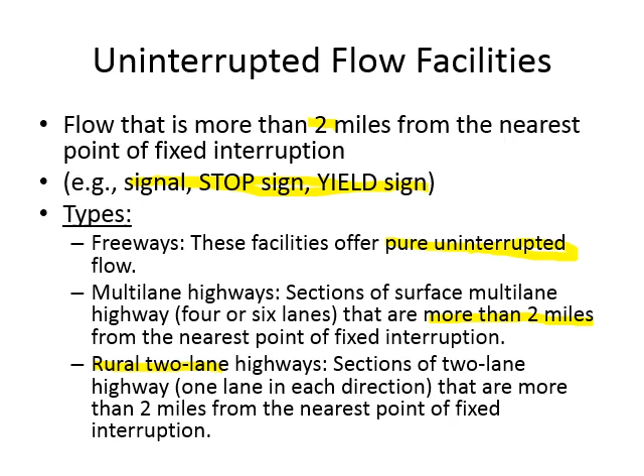The procedure we will follow for finding out the level of service or capacity of these highways is taken from the Highway Capacity Manual, published by the USA. So it is their standard for finding out capacity and level of service. It is published by the Transportation Research Board, which is under the National Academy of Engineering in the USA.

The first manual was published in 1950, and after that they have published several versions of it, with the last one published in 2016.

The concept of a software was introduced in 1994 with the manual. So from 1994 onwards, every manual has its own software which you can get with the manual, and that software is for implementing the procedures described in the manual. So it's a very limited application software.

And the name of the software is Highway Capacity Software. It is published by the University of Florida, and they update it once a new manual is published. But we don't have to depend upon this Highway Capacity Software.

We have other softwares which implement the procedures described in the manual. For example, we have VISSIM - if you search for VISSIM, you can find a student copy for it. We have Sidra - I have a trial version for it, and you can download the trial version as well. We have Synchro, and there are many other softwares that can be used for implementing the procedures of the Highway Capacity Manual. So you don't have to depend upon Highway Capacity Software itself.

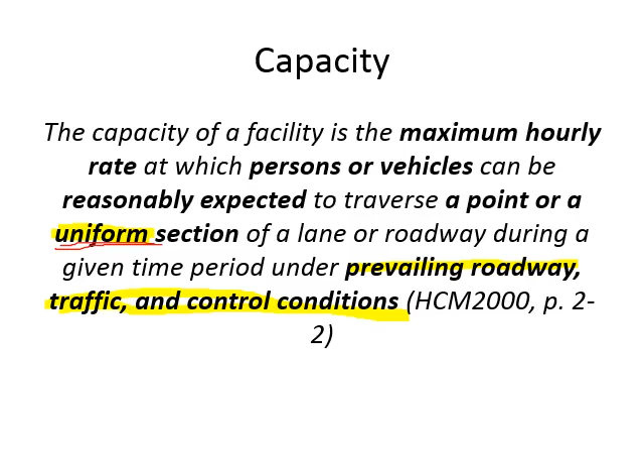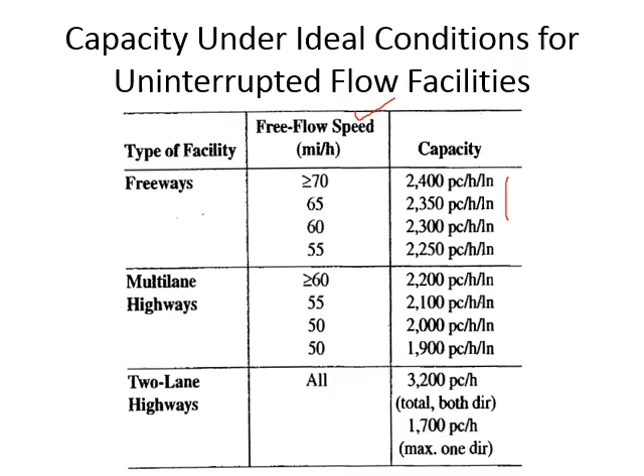Now the highway capacity manual has introduced the concept of LOS. LOS means level of service. LOS stands for level of service. Now why was this concept introduced? Without the concept of level of service, we know two traffic conditions: one is free flow and the other one is capacity of the highway. Now both these conditions are unsuitable for design.

You cannot design for free flow conditions because that means no volume. You cannot design for no volume. You cannot design for capacity as well, because that means you don't have any margin of error. If even 10 vehicles come extra, your highway will get jammed. So designing for capacity or designing for free flow conditions is not valid, is not practical.

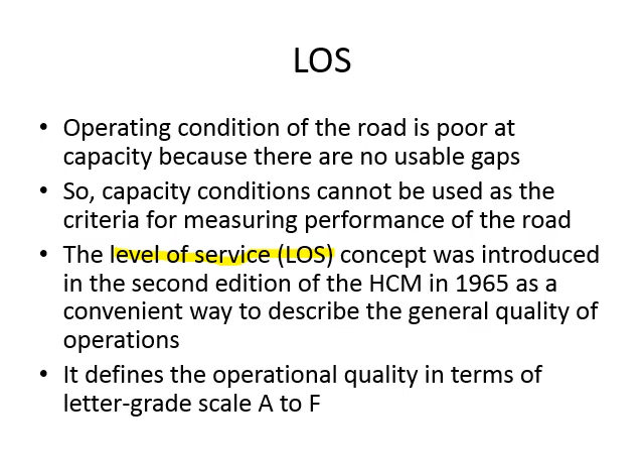So we need some intermediate levels between the free flow condition and the capacity condition for which we can design the highway. These intermediate levels are represented as level of service. This concept was introduced in 1965, and there are 6 levels of service starting from A to F. So just like your grades, A is what you want and F is what you don't want. A is free flow and F means jam, traffic jam. So the performance of the highway is measured in terms of level of service, which ranges from A to F.

So how do we define level of service? It is basically the quality of operational conditions of the highway, or the quality of operations of traffic on the highway. Normally level of service is affected by speed and travel time, and you can measure speed and travel time as well.

But there are other important parameters which are not measured easily and which are incorporated in level of service. For example, freedom to maneuver, how easily you can maneuver within the traffic, how easily you can move, increase the speed, decrease the speed, and so on. What is the condition of traffic interruptions, how many interruptions are there on the road, what is the level of comfort and convenience of the drivers. So all these things affect level of service, and all these parameters combinedly denote the quality of traffic flow.

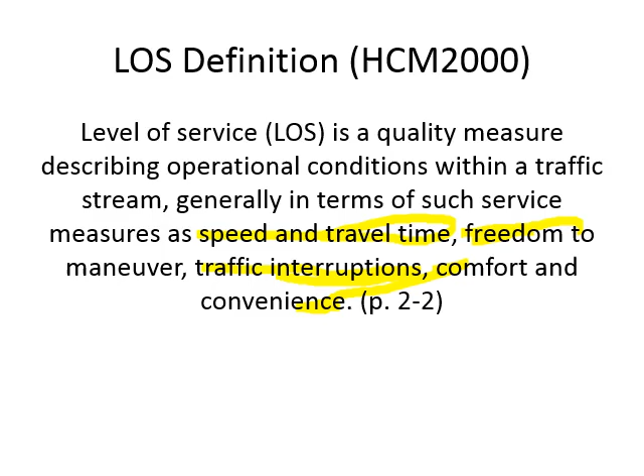So as I said, level of service can range from A to F. A means complete free flow, so your motion or movement is not influenced by other drivers. Your speed is not affected by the flow because the flow is almost negligible, so you are driving at the design speed of the road or close to it. In these conditions, you can change your lanes or do other maneuvers very easily.

And even if you have some blockage within traffic, that will not cause any disruption of the flow, because even if one lane is blocked, you can easily go from the other lane and so on. The spacing between the cars in this condition is very high, almost 500 feet.

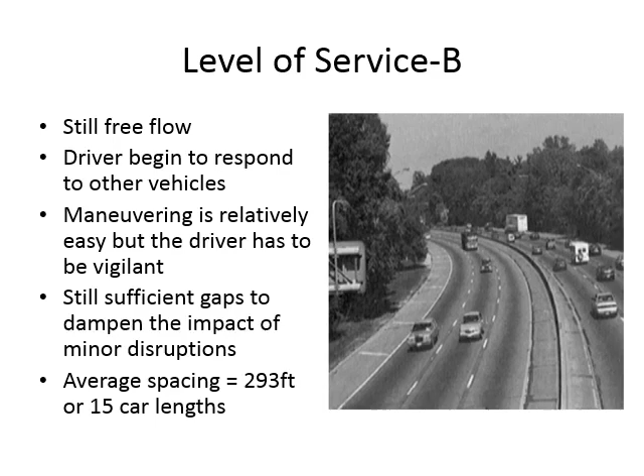Level of service B is still considered free flow condition, but now you have to respond to other drivers sometimes. Maneuvering like changing lanes, braking and accelerating is still easy, but you have to be more careful because there are more cars around you, or they're closer to you. You can still do your maneuvers easily and instantly, but you have to take more care. If there's any disruption, like a lane closure or accident, there are still enough gaps to avoid its effect on traffic. The car spacing in this condition is almost 300 feet.

Level of service C is still considered free flow, but maneuverability is restricted now. If you're in your own lane, you can move at free flow speed easily, but when you want to change lanes, you may not find the gap. Or if you want to accelerate, there may not be much gap between you and other drivers to do that, so you have to be more careful. In this condition, if you have a disruption that continues for a longer time, like an accident blocking half the road for half an hour, that may cause a complete traffic jam because there are no gaps now. The spacing between cars in this condition is almost 200 feet.

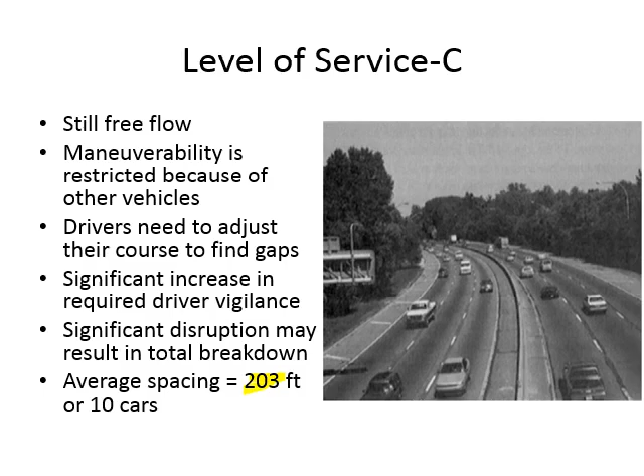Level of service D is what you get after free flow. In this condition, the speed is below free flow level and density is increasing rapidly. A breakdown even for a small duration can cause a disruption in traffic, maybe a complete traffic jam as well. Now your maneuvering is very difficult. Most of the time you're following other drivers, and in order to change lanes you may have to wait for a longer time. The spacing between cars in this condition is almost 150 feet.

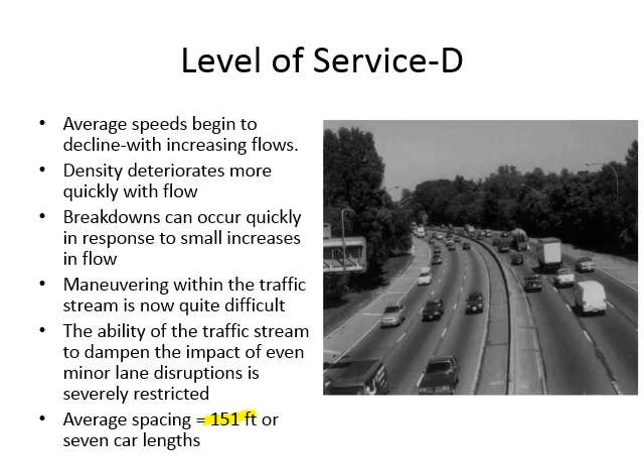Level of service E is what you call almost capacity. Level of service E indicates basically capacity... Actually, capacity means the road is completely filled, so there are no gaps. So even if somebody has to change lanes, other drivers have to give him time to do that, otherwise there are no gaps, so other drivers have to stop for him. They have to be nice to other drivers in this condition. And when other drivers stop for a guy who wants to change lanes, it will cause a shockwave effect in that lane, it will start a queue in that lane. So you cannot afford even a small disruption, but that will cause a traffic jam. In this condition, the spacing between cars is 117 feet.

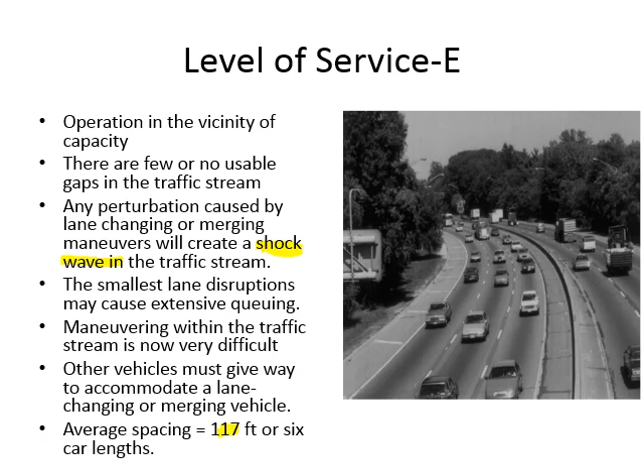Then we have level of service F, which is after capacity. So after capacity is considered a traffic jam or breakdown. You may see level of service F happening because of an incident or accident, maybe construction work going on, road blockage, or things like that. Or it can happen because the flow coming to the highway has exceeded its capacity, as we've seen in examples from previous chapters. Normally level of service F is seen upstream of a bottleneck. We discussed previously that a bottleneck is a point restricting the flow, the demand to go forward. So the section which does not fulfill its demand, just before that section you will see a queue of vehicles, and that queue basically represents level of service F.

With each level of service you have a corresponding flow rate, the maximum flow rate which you can have at that level of service. If you exceed the value of that flow rate, you will no longer be in that level of service, you have exceeded it. For example, we have a flow rate of 200 passenger cars per hour per lane for level of service A. Until 200 passenger cars per hour per lane, your road condition is at level of service A. When you exceed that, you go into level of service B, and there will be a maximum value for level of service B as well, and when you exceed that you enter level of service C.

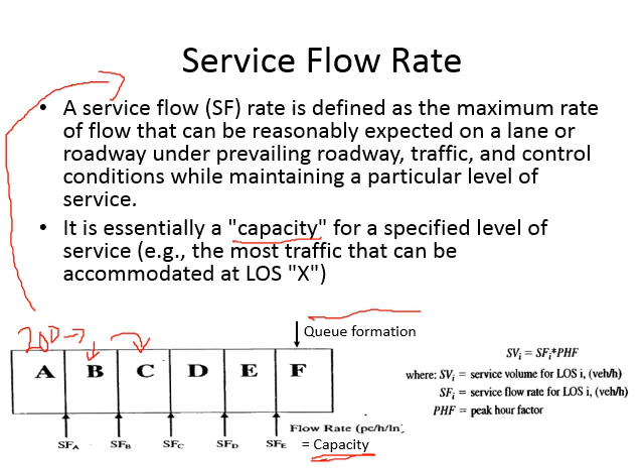Now let us discuss the complete definition of basic freeways before we move on to the analysis. Basic freeways are pure uninterrupted flow facilities, so they don't have any intersections. How do you get on or get off a freeway? You have to use ramps, which will take you on the freeway or off the freeway. These are lanes which are going on the bridge or coming out of the bridge, and the bridges are normally the freeways. So there are no intersections, you have to make the exits and entrances through the ramps.

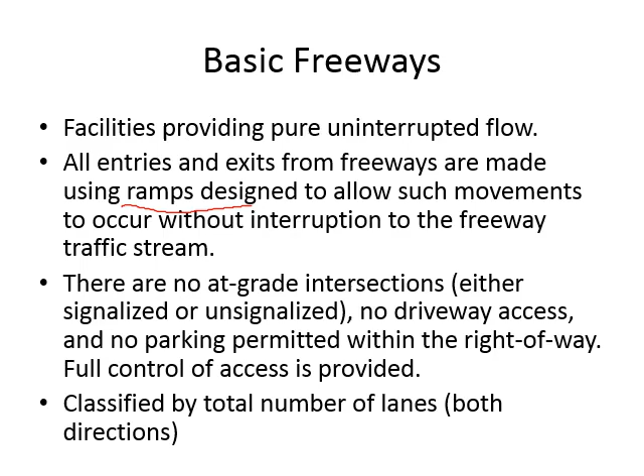The basic freeways can be of different types based upon their number of lanes, and when we say number of lanes, we have to consider total number of lanes, which includes both directions.

Then we have multi-lane highways that are also considered uninterrupted, but they are not purely uninterrupted. They have intersections or interruptions, but these intersections are more than 2 miles from each other. This is the main difference between multi-lane highways and freeways.

The sub-classification of multi-lane highways is on the basis of its number of lanes and median type. Number of lanes, as we said, is the total number of lanes in both directions, and median type can be divided or undivided. Divided means with median, undivided means without median. This is another difference between multi-lane highways and freeways. Multi-lane highways can be undivided, freeways are always divided. Freeways cannot be without medians, but multi-lane highways can be with or without medians.

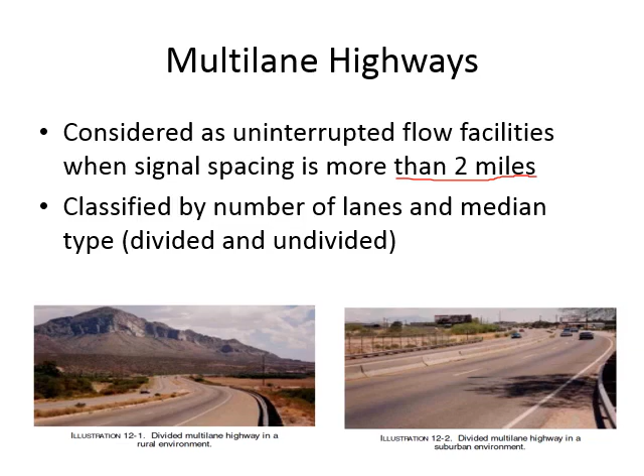The capacity analysis or level of service analysis for both these types of highways are done together because the procedure is the same. The first thing you need to know is the free flow speed of the highway, which we discussed earlier as the speed in free flow conditions when the volume is almost zero.

But if the volume is actually zero, then measurement of speed is not possible. So we have adopted a practical definition of free flow condition: if the flow rate is less than 1000 vehicles per hour per lane, you can consider it a free flow condition. So up to 1000 vehicles per hour per lane is under free flow conditions, and any speed measured in this condition can be considered free flow speed.

After you know the free flow speed, you have curves between speed and flow rate, which can give you level of service and capacity for multi-lane highways and freeways. But these curves are used for ideal conditions. Now what are the ideal conditions?

The first ideal condition is that there are no heavy vehicles in the traffic stream, which also means all the vehicles are passenger cars. The other ideal condition is that all drivers are familiar or regular users of the facility. By regular or familiar, we mean drivers who drive on the highways on a regular basis, routine basis, maybe at least once a week or something like that.

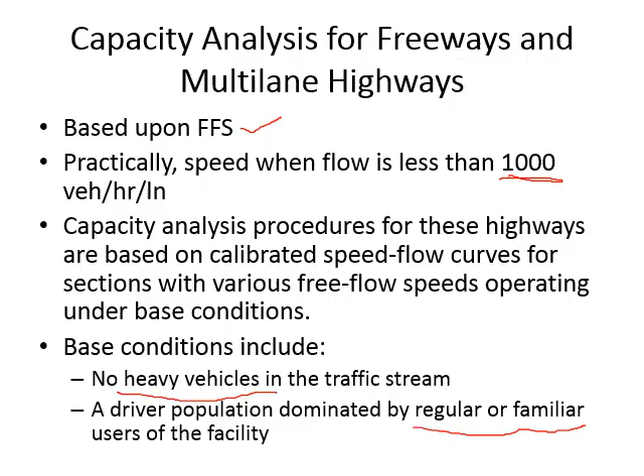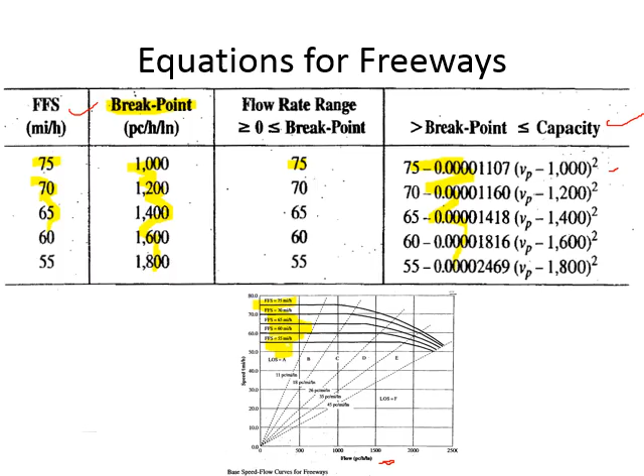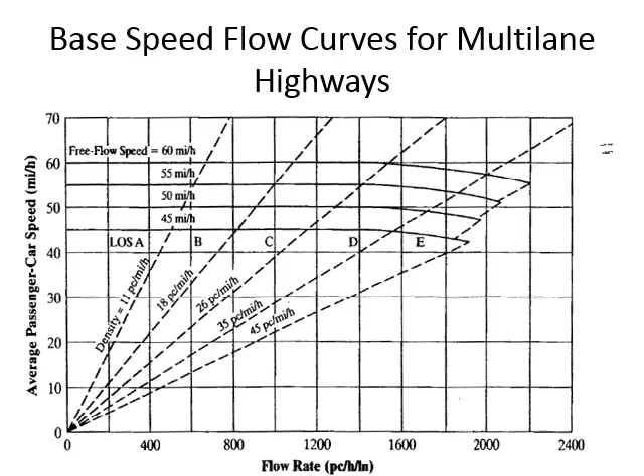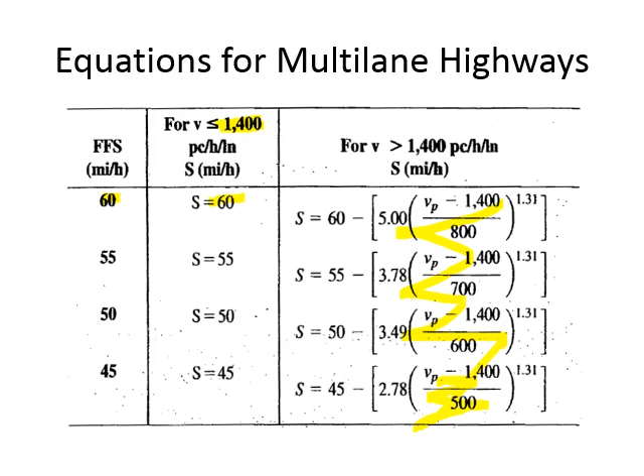Now, as you have seen in the curves, the level of service is marked with diagonal lines on the curve. If you take the slope of any of these lines, it will be speed upon flow, and if you take the inverse of that, it will be density.

Flow upon speed is density. So if I know the slope of any of the lines, I can do the inverse and find out its density. The level of service can be represented in ranges of density as well. For example, for level of service A, the density will range from 0 to the inverse of the slope of the first line.

Then for level of service B, the range of density will be between the inverse slope of this line and the inverse slope of the next line, and so on. For every diagonal line, you can take the slope, do the inverse, and find out the range of density for that level of service. So if you know the density, you don't have to look into the curves.

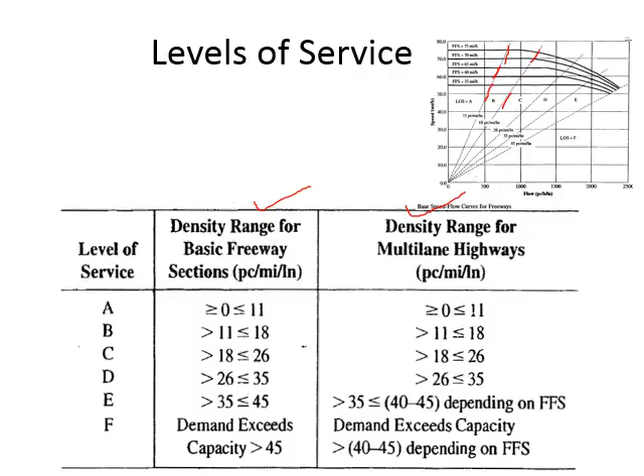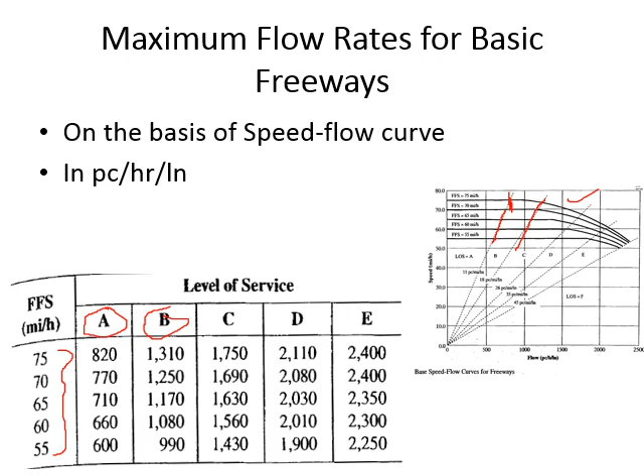Then the same thing has been done with the curves of multi-lane highways, so we have the service flow rates for multi-lane highways as well. Since the values in the diagram are in passenger cars per hour per lane, these flow rates are also in passenger cars per hour per lane.

So we have this example in which the adjusted demand flow rate for a highway is given as 1800 passenger cars per hour. Adjusted means it is already converted to the ideal value of passenger cars and so on. The free flow speed of the highway is given as 65 miles per hour, and we have to find out the level of service for this highway. Now you see, the 65 miles per hour speed curve is this one.

Okay, if you plot 1800 on the x-axis, you go up and reach the curve of 65 miles per hour. So you are at this point. And this point, as you can see, is within the diagonal line which represents level of service D.

So from the curve I know that the level of service is D. Now if you want to know the speed of traffic on the highway, from this point you draw a line towards the y-axis. They have already drawn it for us, and this line crosses the y-axis at this point, estimated to be at 62 miles per hour. So the average speed of traffic on this highway is 62.

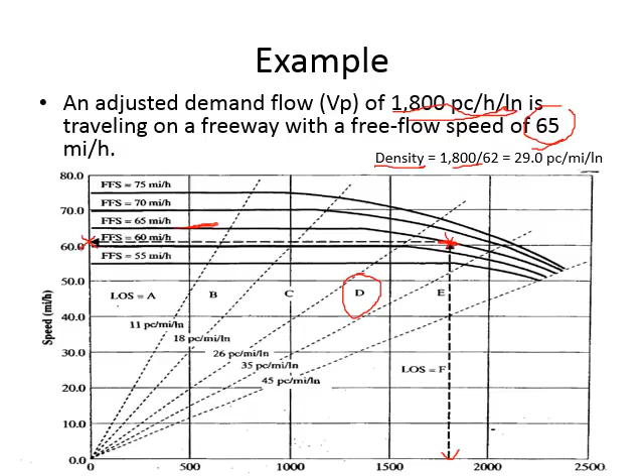Now we have a density table as well, in which the level of service is given in terms of density. Let us look at that table. So you can see the table here on the top. For a freeway, if your density is 29 passenger cars per mile per lane, that means you are in this range, and this range indicates level of service D.

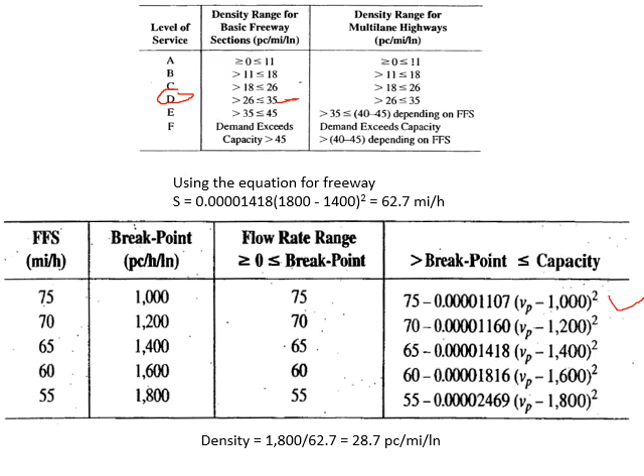Now let's say you do not have the speed flow curves, and you have these equations instead. First I have to pick the free flow speed, which is 65. Did I cross the break point or not? My flow rate was 1800, so that means I have crossed the break point. So I have to use this equation. Using this equation, putting Vp as 1800, the value comes out to be 62.7 miles per hour.

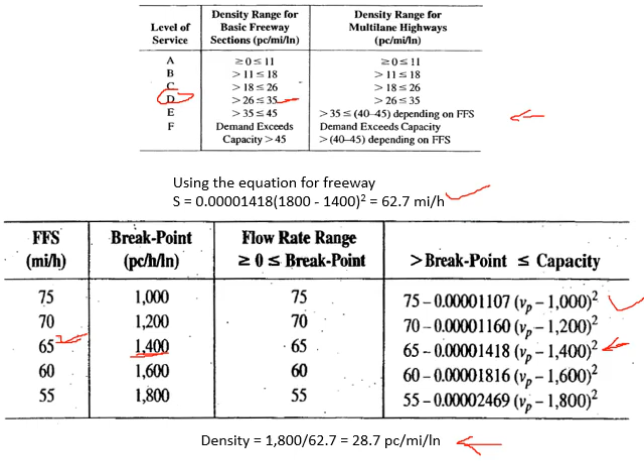Now, if you calculate the density using this value, the flow is 1800, the speed is 62.7 miles per hour, so your density will be approximately 28.7 passenger cars per mile per lane. And if you go back to this table, you will see that it's still in the range for level of service D.

Now, whenever you are finding out level of service or free flow speed of a highway, these are the conditions you must know, called prevailing or existing conditions of the highway. You should know the lane width, you should know the lateral clearance - the distance from the edge of the lane to the nearest obstruction or object. Then the type of median if it's a multi-lane highway, because for freeways medians are already there.

Then frequency of ramps if it's a freeway, because on freeways the exits and entrances are from ramps. And frequency of access points if it's a multi-lane highway, because on multi-lane highways you have access points, meaning at-grade junctions or intersection points.

Then you must know the presence of heavy vehicles in the traffic stream - if they are present, what is their percentage? And you should know the proportion of drivers who are familiar drivers - that was the other base condition we discussed earlier, that drivers should be familiar or regular. So what is the proportion of occasional drivers, meaning they come on the highway very rarely or are unfamiliar users? What is their percentage?

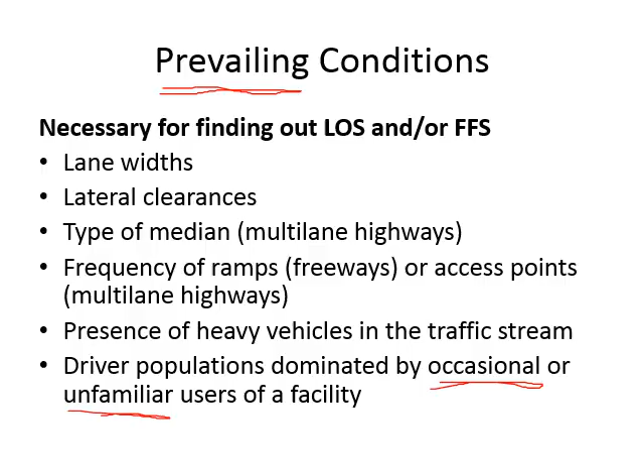On the section of highway which you are considering for your study - let's say this is a section of highway - from the midpoint of this section, you go 3 miles forward and count how many ramps you have on the right hand side, then you go 3 miles back and count how many ramps you have on the right hand side. So it's a total of 6 miles, 3 miles back and 3 miles forward. You count how many ramps you have in this 6-mile length, then divide by 6, the number of ramps divided by 6. This will give you total ramp density.

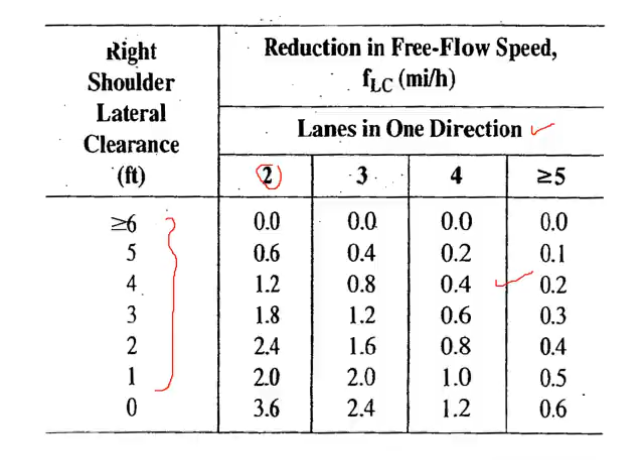And then you have the 4 adjustment factors. The first one is for lane width, which I already showed you. The second one is for lateral clearance. Then the third one is for median type, and the last one is for access point density.

Now lateral clearance for multi-lane highways is measured from both directions, or from both sides of the direction which you are considering. So you have to consider how much lateral clearance you have on the right hand shoulder, and then you have to consider how much lateral clearance you have on the median side. So from the edge of the lane in your direction, how much is the distance to the edge of the lane in the other direction.

Or if there is a median, then how much is the distance between the median and the edge of the lane in your direction. So that will be the lateral clearance on the left hand side, and in the end you will add both of them to get the total lateral clearance.

Then we have the factor for median type, and the access point density. Now if we don't have a median, then the lateral clearance on the left hand side will become 0. In that case, total lateral clearance should be lateral clearance on the right hand side plus 0. But since we have a factor which is already accounting for median type, whenever we don't have a median, we will consider the lateral clearance on the left hand side to be equal to 6 feet, which is our standard value for lateral clearance.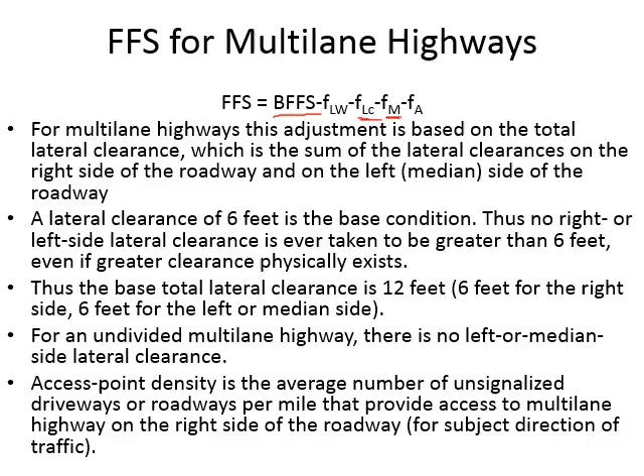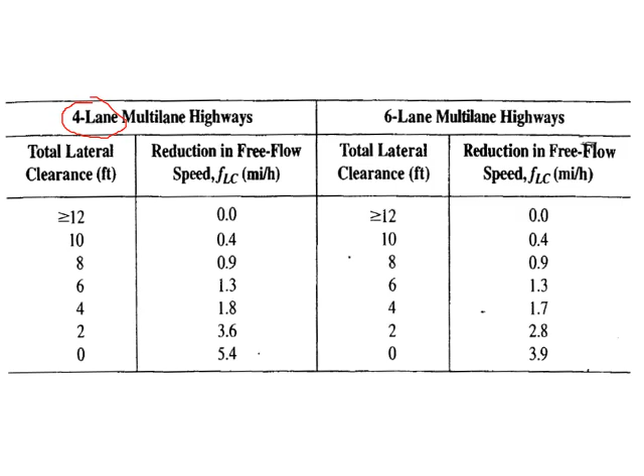So this is the table for factor for lateral clearance. It's given for a 4-lane highway and a 6-lane highway.

Now what does it mean? It's an extra lane given in the middle of the road, which can be used by drivers from both directions whenever they want to make a left turn. So let's say we have one lane here, then we have the extra lane, and then one lane on the right hand side.

If you're the driver in this lane and you want to make a left turn, you will come to this lane, and from here you will make the left turn. Similarly, if there's a driver coming from this direction and he wants to make a left turn, he will go into this extra lane from his direction, and he will make the left turn from here. So these lanes can serve both directions, which is why we call them two-way left turn lanes. We don't have them here, but in the USA and some other countries they use it.

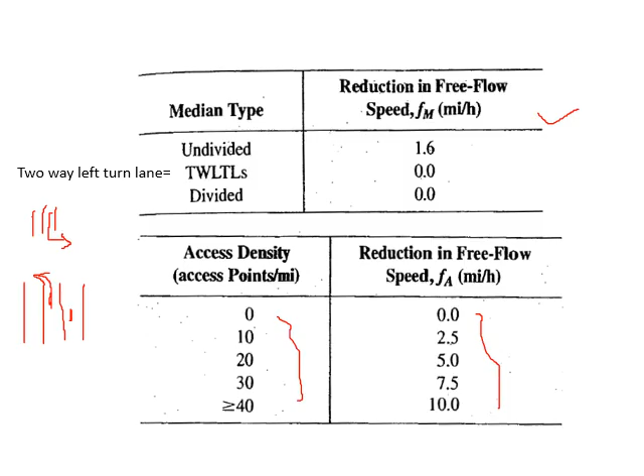Consider this example. We have a 6-lane old freeway. It has 11 feet lane width, and it has road obstructions coming after 2 feet from the right hand side of the pavement edge, and the ramp density is 3 ramps per mile. You want to know the free flow speed of this freeway.

So the equation for finding out the free flow speed is given on top here. We needed the adjustment factor for lane width. The lane width is given as 11 feet, so the adjustment factor will be 1.9, and lateral clearance was given as 2 feet, and it's a 6-lane freeway, so number of lanes in each direction is 3, so your adjustment factor for lateral clearance will be 1.6. The ramp density is given as 3, so you put TRD equals 3 here. After putting the parameters into this equation, you will get the free flow speed to be 63.8 miles per hour.

This example is for a multi-lane highway. So we have a 4-lane undivided multi-lane highway. The posted speed limit is given. We have 11 feet lanes, and we have frequent obstructions coming 4 feet from the right hand side edge. Access points are 30 access points per mile, and we have to find out the free flow speed for this direction.

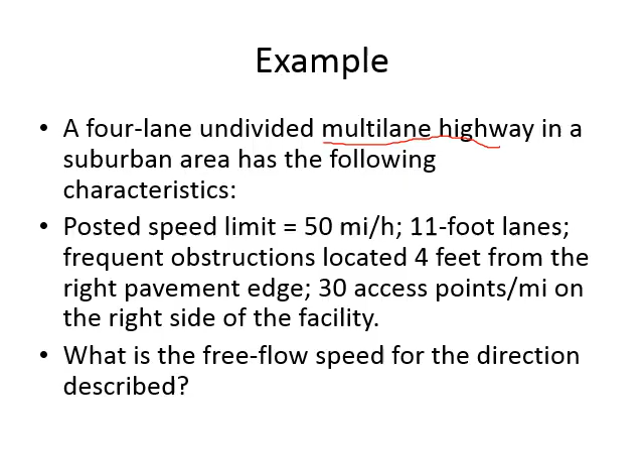So the equation for multi-lane highway free flow speed is this one. In this equation, the first thing you need is BFFS, which is the design speed of the highway. Now in the question, they have given me the speed limit to be 50. Speed limit is normally below the design speed, so I know I need to add something to this value to get the base free flow speed. That value is normally, or at least minimum, 5. So whenever you are given the speed limit of the road and you want to find out the base free flow speed or design speed of the highway, you can add 5 into it, and then you reach the base free flow speed value. So in this case, base free flow speed for me is 55.

Then I need the factor for lane width adjustment, which will come from the table I already showed you for multi-lane highways as well. So for an 11 feet lane, the factor for lane width is 1.9.

Then lateral clearance. The lateral clearance on the right hand side was given as 4 feet, and it was said that the left hand side is undivided. It's an undivided highway, so as I told you earlier, if it is an undivided highway, then the left hand side lateral clearance will be taken as 6 feet. So right hand side is 4 and left will be 6, so 6 plus 4 gives you 10 feet. For a 10 feet lateral clearance, you are here, and it's a 4-lane freeway, so you have to look into this section. So your factor comes up to be 0.4.

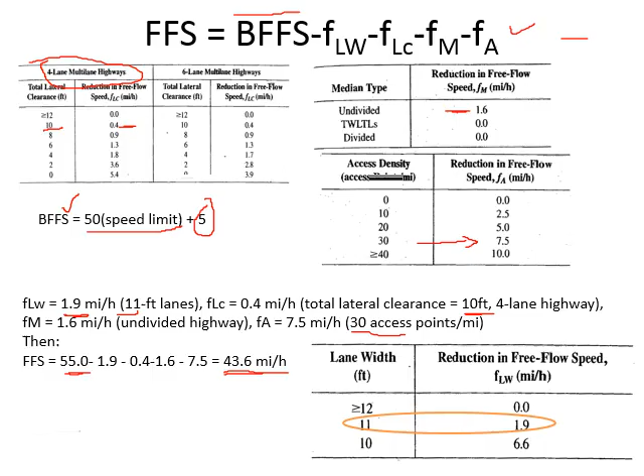One of the reasons for calculating the free flow speed is to use these curves to find out the level of service or capacity or whatever. And I showed you the equations for these curves also require you to have the free flow speed with you so that you can select the particular equation. Now the problem with these curves is they are given for specific values of free flow speed, while the values which you are calculating from the equation or from the field may not be exactly equal to these values. So the values given for the curves or the equations are these basically, and you can see they are fixed.

But I may get a value of, let's say, instead of having 75, I may have a value of 74. So what should I do in that case? Which curve should I pick, or which equation should I pick? I don't have any equation or curve for 74.

So in that case, we will basically do some rounding off and we will select the curve or the equation which is nearest to the free flow speed. So which one is the nearest to 75?

So they have given me the ranges here. For 75, anything from 72.5 to 77.5 is considered close to 75. Similarly, anything from 67.5 to 72.5 is considered close to 70, and so on. So they have given basically the range which can be considered close to a particular free flow speed value for which the curve and the equation is given.

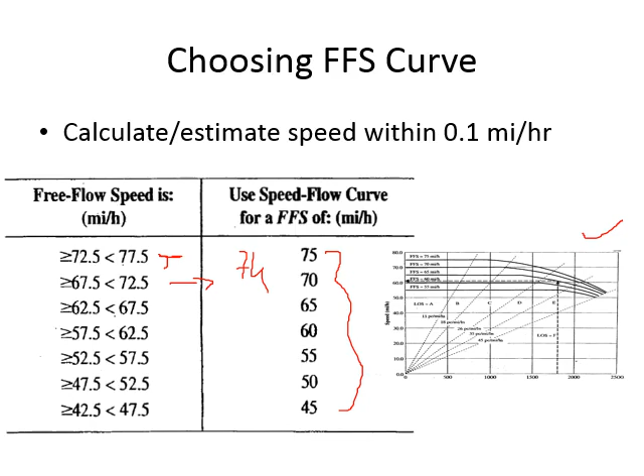So basically you have to pick the nearest value, and if it is exactly in the middle, then you will go for the higher value. So 67.5 is considered close to 70, and 62.5 is considered close to 65, not 60, and so on.

Using level of service, we can perform three types of analysis: operational analysis, service flow rate and service volume analysis, and design analysis.

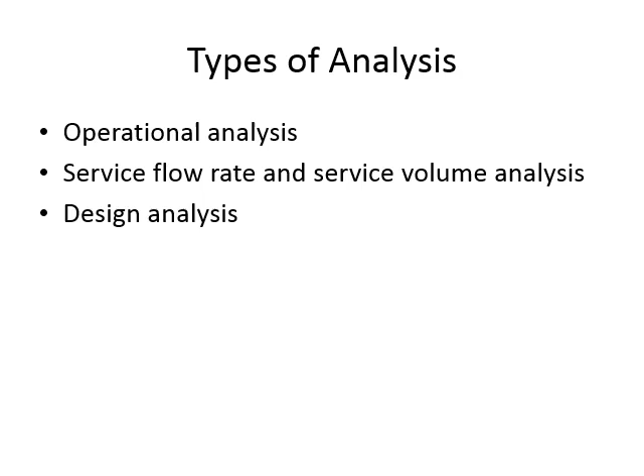Operational analysis means that you have an existing road which has a traffic condition, a roadway condition, and some control conditions which are given, or you can go and observe it, and you are trying to find out the level of service for that highway.

Now for finding out level of service, we need two things: we need free flow speed and we need the flow rate. And that flow rate should be in passenger cars per hour per lane.

When you go in the field, you take the volume for the peak hour, so we are calling it as V. This is the volume. If you want to convert volume into flow rate, you have to divide by the peak hour factor.

And then the flow rate is taken as per lane, so you have to divide by number of lanes as well, and this is number of lanes in your direction, and then you have to convert the number of vehicles to number of passenger cars.

This is one of the ideal conditions, that all vehicles are passenger cars. So you'll divide it with a factor which is called the factor for heavy vehicles. You can see it here, and we will discuss later on how to calculate this factor.

And the last factor is the factor for driver population, which is the proportion of drivers which are familiar with your highway - they are regular drivers on the highway. Again, the last two are basically part of the ideal conditions that we have said - the base conditions: all drivers are familiar drivers and all vehicles are passenger cars.

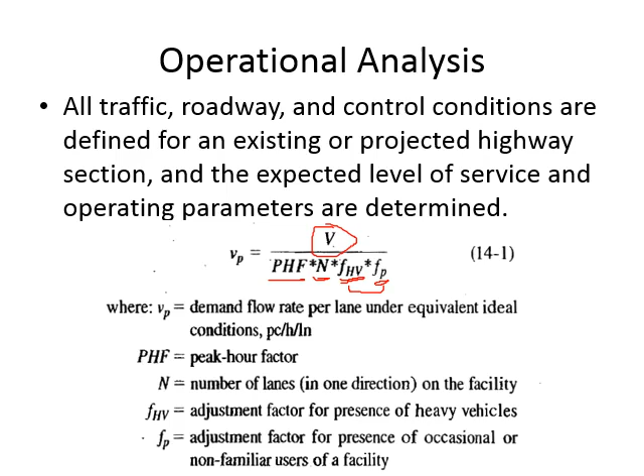Then if you are doing a service flow rate or service volume analysis, you are trying to find out how much should be the service flow rate for any highway under the prevailing conditions, under the existing conditions. So you are given with a set of conditions, and they have asked you to find out how much flow rate we can allow to maintain the level of service under I.

So I is the level of service which you want, and then you calculate it for the existing conditions.

You take the maximum service flow rate, which is the ideal service flow rate you will get from the speed flow curves from which you were getting the level of service as well, and then you multiply with the number of lanes and the factor for heavy vehicle and the factor for driver population.

After multiplying with this factor, you will get the flow rate in vehicles per hour.

And then if you want, instead of flow rate, if you want service volume, then you multiply the service flow rate with peak hour factor as well. So you will get service volume for level of service I.

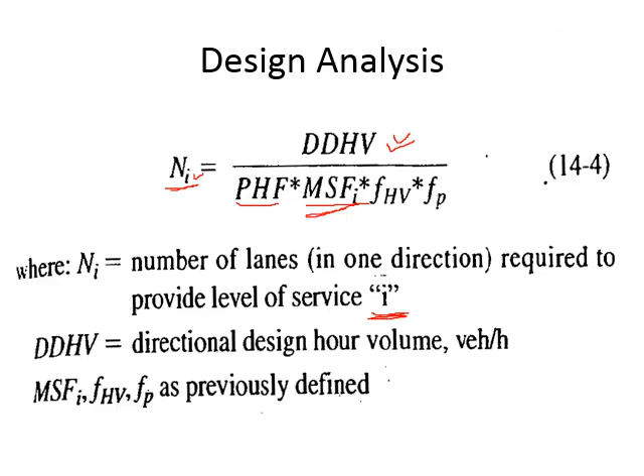We have PR, which means percentage of recreational vehicles. And then we have ET, which is the equivalency factor for trucks. And we have ER, which is the equivalency factor for recreational vehicles.

Now before using this equation, let us define what we mean by heavy vehicles. According to the Highway Capacity Manual, any vehicle which operates on more than 4 wheels is called a heavy vehicle. So cars are not considered heavy vehicles.

Even if you have a truck or a bus which is operating on 4 tires, it cannot be considered a heavy vehicle. So bikes and all these things cannot be considered heavy vehicles.

And then within heavy vehicles we have trucks and buses. We already know what we mean by trucks and buses. And we have recreational vehicles.

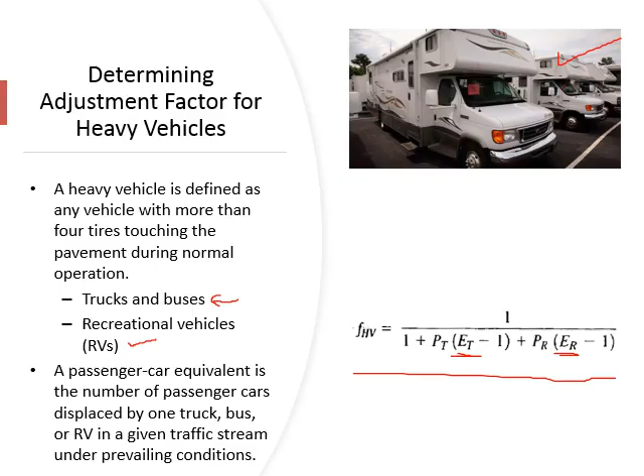Before we go for the equivalency factor, they are calling it here the passenger car equivalency factor, but basically it means the same thing.

You have to determine the terrain conditions first, before you look into the factor. Heavy vehicles may have a different effect in different terrain conditions. For example, a truck driving on a flat surface will have less effect on traffic compared to the same truck driving on an upward gradient, and the effect on an upward gradient will be different from the effect on a downward gradient. So first you must identify the terrain conditions on the road, and based on that you identify the equivalency factor.

Terrain conditions can be divided into two main categories: general terrain condition and gradient condition. We have three general terrain conditions mentioned here.

You can have level terrain where the gradient is less than 2%. You can have rolling terrain where the gradient is 2% or more, but it is small and subtle, with no sharp gradient or sharp change in gradient. This will cause heavy vehicles to reduce speed, but they will still be driving at a significantly high speed.

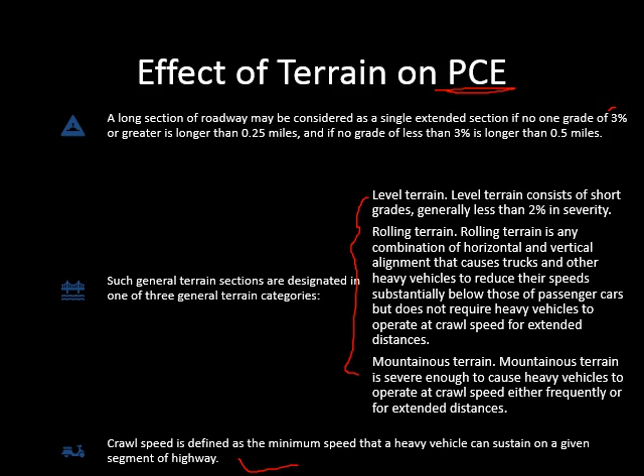So these are the general terrain conditions. Then we have the gradient condition. If you have a section of highway with a length of more than 0.25 miles and its gradient is 3% or more...

If a gradient of 3% or more is maintained for less than 0.25 miles, you consider it general terrain conditions. If it continues for more than 0.25 miles, you consider it a gradient condition. Then there's another condition: if the gradient is less than 3% but its length goes more than 0.5 miles, you again consider it a gradient condition. If it goes for less than 0.5 miles, you consider it a general terrain condition.

So to consider any highway under general terrain conditions, we have two conditions. First, if the gradient is 3% or more, it should not continue for more than 0.25 miles to be considered general terrain. Second, if the gradient is less than 3%, it should not continue for more than 0.5 miles to be considered general terrain. If it goes beyond that, you consider it a gradient condition, not general terrain.

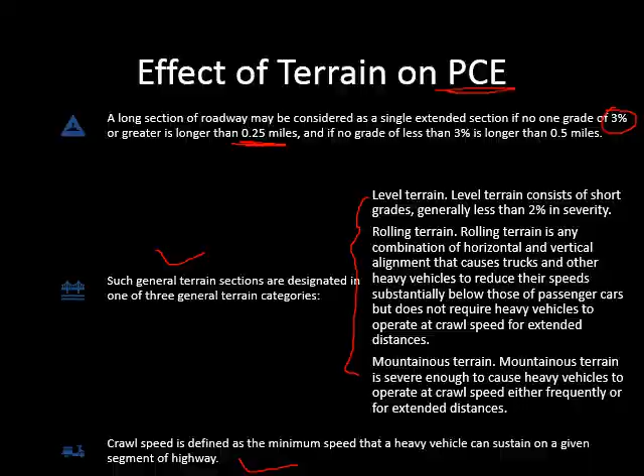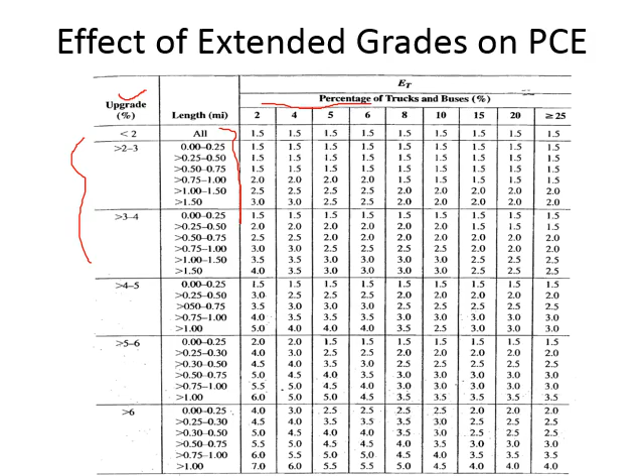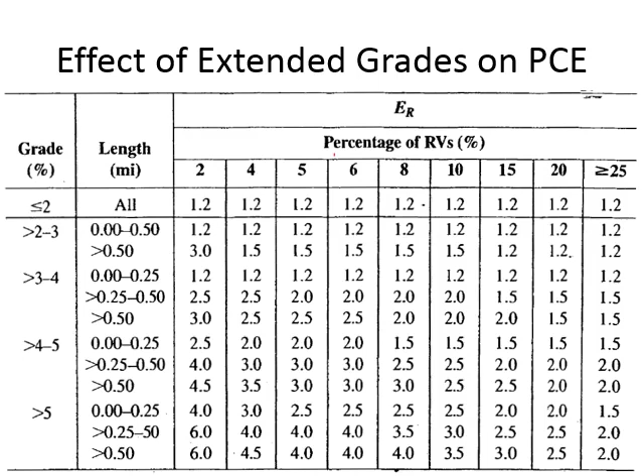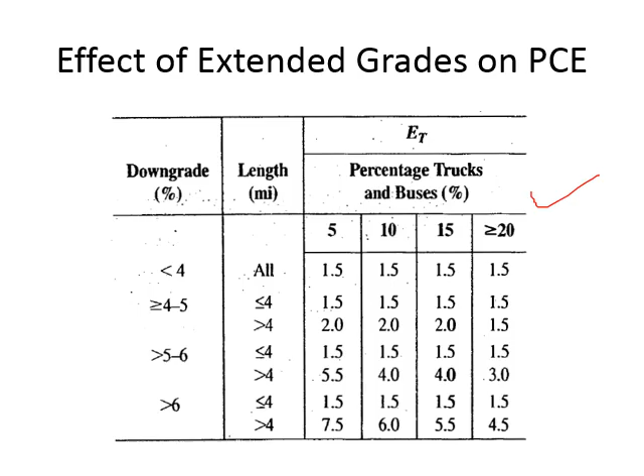Similarly, for an upward gradient, to find the value of ER, you use this table, but instead of the percentage of trucks and buses, you use the percentage of recreational vehicles. For a downward gradient, to find ET you use this table. To find ER for a downward gradient, you use the ER for level terrain — ER downward gradient equals ER of level terrain, irrespective of the gradient value. But for ET downward gradient, you have this separate table here.

If you divide the volume with heavy vehicle adjustment factor, it will convert from vehicles per hour to passenger cars per hour. So 3200 should be divided with heavy vehicle adjustment factor, and heavy vehicle adjustment factor can be calculated as this.

Now in this equation, PT is given as 12% here, percentage of trucks. PR is given as 3%, percentage of recreational vehicles. And for ET and ER, we have to look into the table for general terrain conditions because it's a rolling terrain. So you can see for rolling terrain, ET is 2.5 and ER is 2.

So if you put all the values in the equation for heavy vehicle adjustment factor, you will get heavy vehicle adjustment factor to be 0.82, and if you divide 3200 with 0.82, you will get 3872 passenger cars per hour. There is another way to solve this equation, which is directly multiplying with the equivalency factors. So how do you do that?

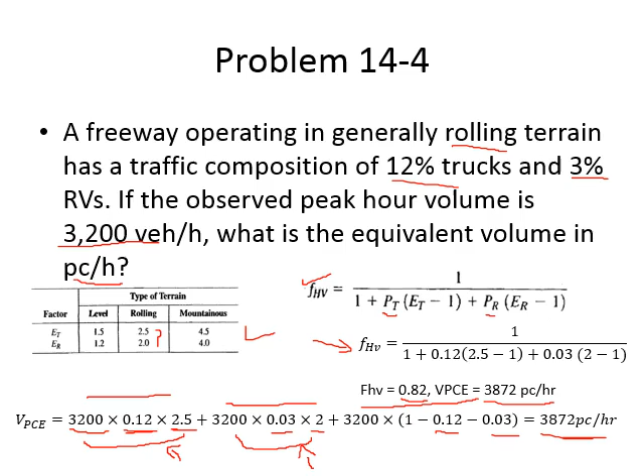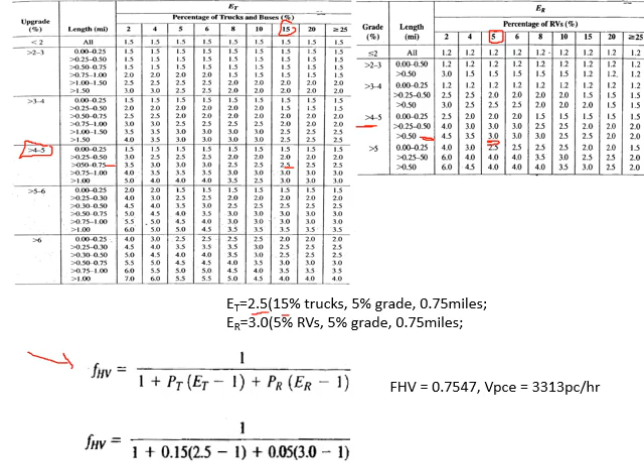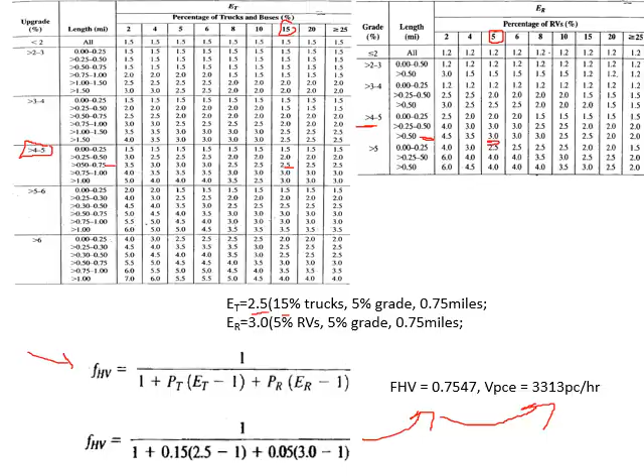Then we have 5% gradient, which is in this range, and 0.75 mile length, which is here. So the value of ER will come out to be 3. If you put the values in the equation for FHV like this, the FHV will come out to be 0.755, and if you divide the volume with FHV, you will get the passenger car equivalent volume at 3313 passenger cars per hour. In the previous example, we saw that one value of gradient was given and we were calculating the factors for that value.

But on an actual highway, there can be multiple gradients present in your segment. In that case, calculating factors for each gradient and then calculating the equivalent volume will make the analysis complicated. Instead, if I can combine all the gradient values into a single value, it will make my life easier. So how to combine them?

Let us look at it in this example. So we have a segment in which there is a 3% upward gradient given for 3000 feet, and then there is a 5% upward gradient given for 5000 feet, and we need to combine them so that we can calculate the heavy vehicle adjustment factor for a single gradient. Now to combine them, we will use a method which is called the average gradient method.

For the average gradient method, what we will do is calculate the difference in elevation caused by each gradient. So how much difference in elevation do we have because of the 3% gradient? It will be 3000, the length of the gradient, multiplied by the gradient. So in 3000 feet we have a difference of 90 feet in elevation because of the 3% gradient.

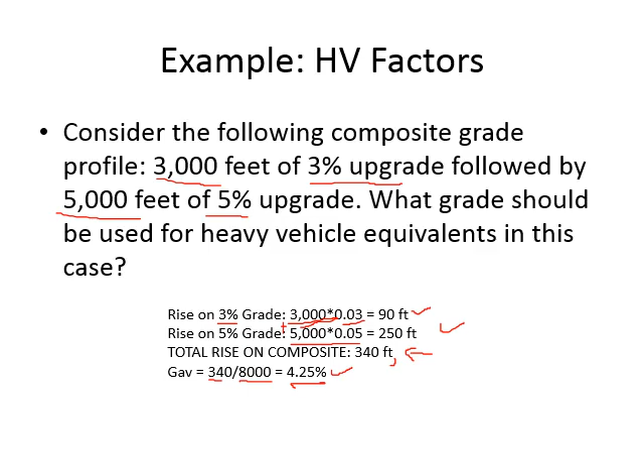Don't use 3% or 5%, use 4.25%. Then there are some more examples for the same procedure. In each example you have to calculate the total difference in elevation and divide by the total length, so you can practice it on your own.

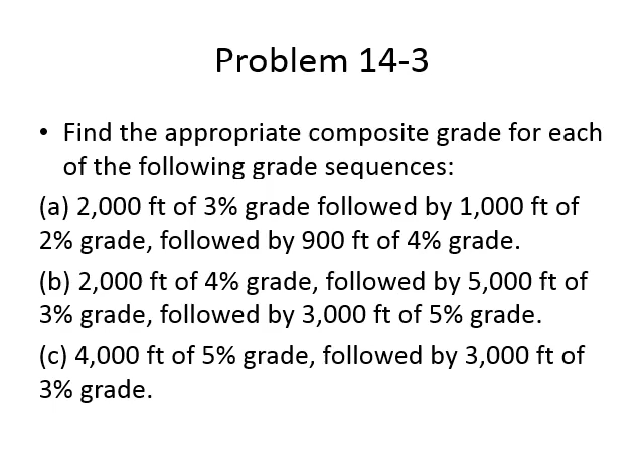Then the last thing we have to know for finding out the flow rate is the driver population factor, which is the proportion of drivers familiar with the highway. Normally it is taken as 1, especially for urban areas, because once the highway is constructed, after a few weeks or months, drivers become familiar with it, and nowadays it comes on Google Maps as well, so after that you are familiar. So normally it is taken as 1, but if you want a worst case scenario, then up to 0.85 is also allowed.

Now we have a 6-lane freeway, and for one direction of this freeway we have been given the service flow rate under the existing conditions. These flow rates are given in vehicles per hour, so from A to E we are given the service flow rates. So we have to answer these 3 questions. The first question is, what is the capacity of this facility?

Now we said from these levels of service, level of service E is basically what represents capacity. So whatever is the service flow rate for E, that becomes the capacity of the facility. So the capacity of this highway is 7000 vehicles per hour.

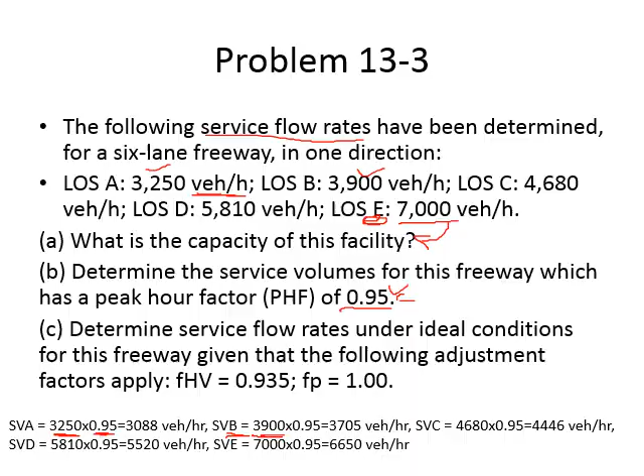For the third part, we have to find out the maximum service flow rate under ideal conditions. Now what are ideal conditions?

The first ideal condition was that we don't have any heavy vehicles. The second was that we have familiar drivers. And these ideal flow rates are calculated per lane.

I have the service flow rates under existing conditions given as vehicles per hour, so I need to convert them to passenger cars per hour per lane. To convert from vehicles per hour to passenger cars per hour, I will divide by the factor for heavy vehicle, which was given in the question.

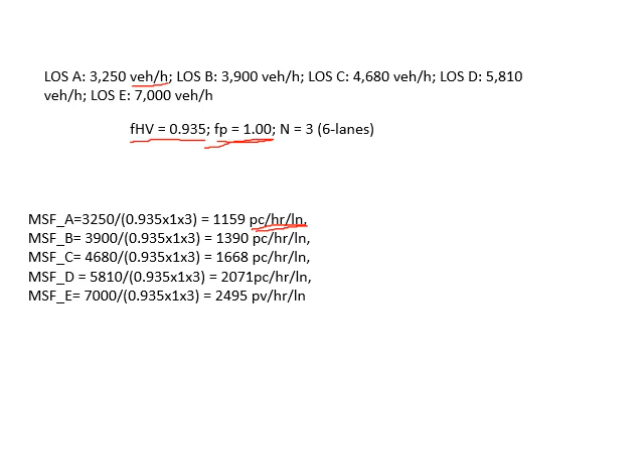To account for non-familiar drivers, I will divide with the factor for driver population, FP. So FP equal to 1 means all drivers are familiar, so I will divide by 1, which will not make any difference.

And then I will divide with the number of lanes in each direction. It was a 6-lane freeway, so the number of lanes in one direction is 3.

So you take values from here, for example, level of service A, the maximum flow rate under existing condition is 3250. So 3250 divided by the heavy vehicle adjustment factor, divided by the driver population factor, and divided by number of lanes in one direction, this will give you the

maximum service flow rate for level of service A under ideal conditions. So under ideal conditions, 1159 passenger cars can be handled by each lane at level of service A.

And you do the same thing for B, C, D, and E, and you get the maximum service flow rate for each level of service.

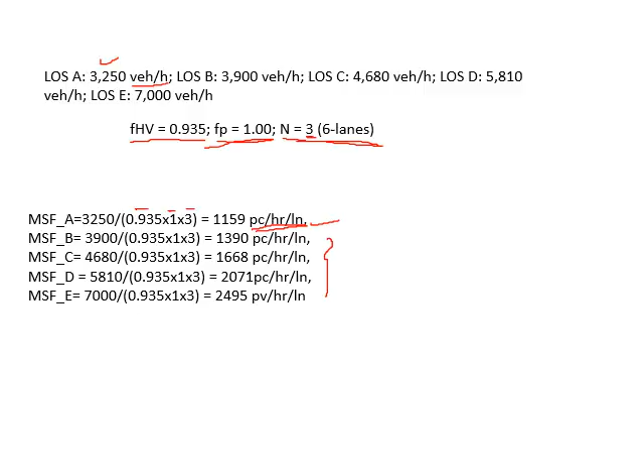So we have this example of a freeway, a 4-lane freeway. It has 10 feet lane width and 0 feet from the lateral obstruction. The ramp density is given. It has rolling terrain. The volume on this freeway is 3,500 vehicles per hour. Peak hour factor is given, and there are no trucks and buses, because this road is considered as a parkway, and a parkway does not allow any heavy vehicles.

So we want to find out the level of service. To find out level of service, I need two things. First is the flow rate. So Vp equals to this, where volume equals 3,500.

Peak hour factor is 0.95. Number of lanes is 2 because it is 4 lanes, so one direction will have 2 lanes. Heavy vehicle adjustment factor is not required because there are no heavy vehicles, and driver population factor, I told you that you can take it equal to 1.

So flow rate comes out to be 1842 passenger cars per hour.

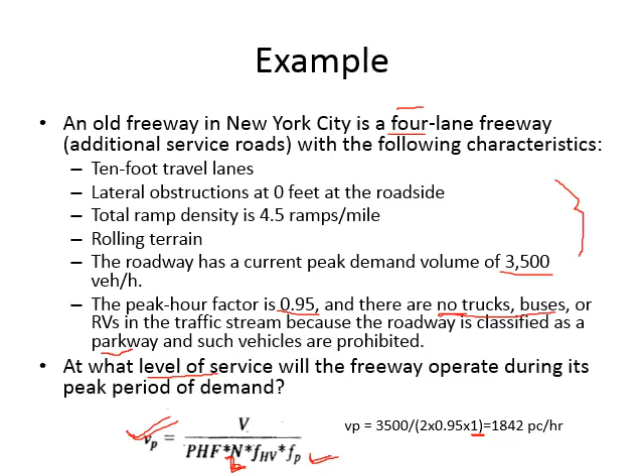Next thing we need is the free flow speed. This is the equation for free flow speed of the freeway. We need the adjustment factor for lane width and lateral clearance. These are tables we have.

So the lane width was 10 feet, so for 10 feet the factor for lane width is 6.6. When the lateral clearance is given as 0, and number of lanes in each direction was 2, so the factor for lateral clearance comes out to be 3.6. And the ramp density was given as 4.5 ramps per mile. You put these values into the equation, and you get the free flow speed to be 53.8 miles per hour.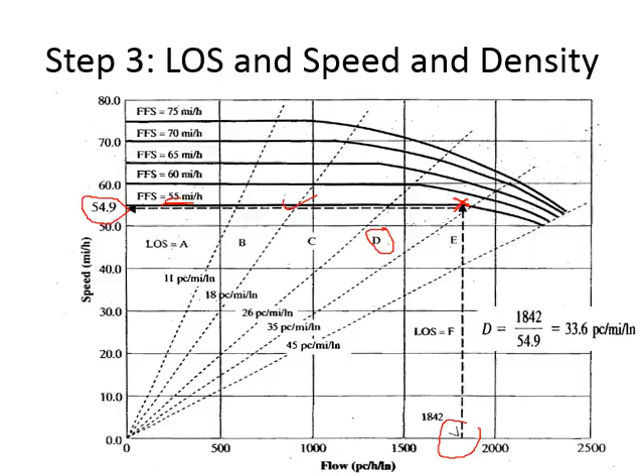We have another example which is for a 6-lane freeway. It has 12 feet lane, 6 feet clearance on the right hand side, rolling terrain, ramp density is given, peak hour factor is given. It has 8% trucks but no RVs, and we have regular familiar drivers. The volume is given, and this volume is increasing by 6% every year.

Okay, and it will continue to do so for the next 20 years. So for the next 20 years, each year traffic increases by 6%. The growth rate is constant for the next 20 years, increasing by 6% every year. So we have to find out the level of service what we have now, and then the level of service after 5, 10, 15, and 20 years. We have to find the current level of service, and then using the volume and growth rate, find the volume in the future year, and what the level of service will be in that future year.

So let us start solving this.

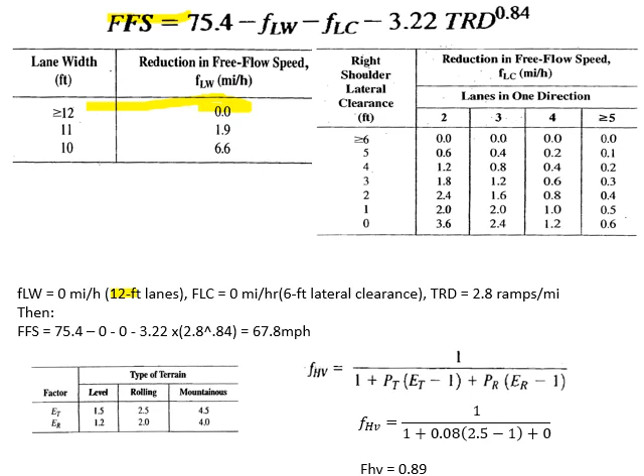We'll start with the calculation of free flow speed. This is the equation for free flow speed. We need the lane width adjustment factor and the lateral clearance adjustment factor. The lane width was given as 12 feet, so the adjustment factor is 0. The lateral clearance is given as 6 feet, so again the adjustment factor is 0. So we only have to worry about the total ramp density, which is given as 2.8 ramps per mile. Putting it in the equation, everything is 0 except the total ramp density, so the free flow speed comes out to be 67.8 miles per hour.

The second thing we will find out is the heavy vehicle adjustment factor. This is the equation for the factor, and in this equation we will only use the equivalency factor for trucks, because there were no recreational vehicles, so that becomes 0. We have 8% trucks, and for rolling terrain the factor is 2.5. When you put the values in the equation, the heavy vehicle adjustment factor comes out to be 0.89.

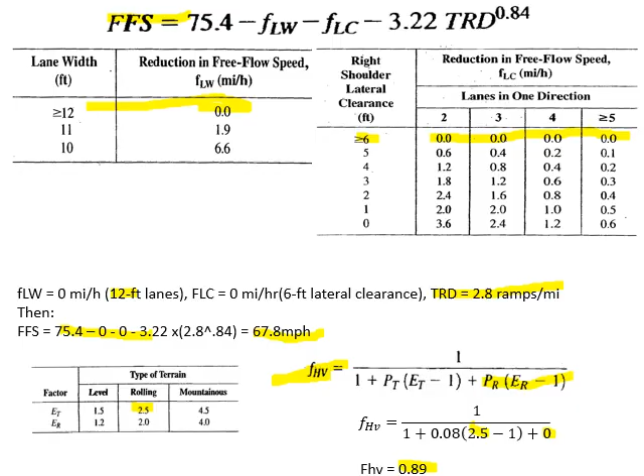Now in this question, since I have to find the level of service repetitively, I will use the concept of service flow rate here. If you remember, service flow rate is the maximum flow rate which you can have at a level of service, and service volume is the maximum volume which you can have at that level of service. So what I will do is find the maximum service flow rate for the free flow speed which I have.

Now I calculated the free flow speed to be 67.8 miles per hour. For 67.8 miles per hour, the service flow rate values are these. Since 67.8 is closer to 70 than 65, I will consider my free flow speed to be 70. For a speed of 70 miles per hour, the maximum service flow rates under ideal conditions are: for A it's 770, for B it's 1250, and so on.

Now, where are we getting these values from? From these curves, which I explained earlier. These diagonal lines, wherever they intersect the curve, you find the value on the x-axis, and this becomes your service flow rate.

So if the service flow rate which I have on my facility exceeds the maximum service flow rate from the table, that means I am in the next level of service. So if the service flow rate on my facility exceeds, for example, 770, that means I'm in level of service B, and so on. So first of all, I need to calculate the service flow rate for my facility.

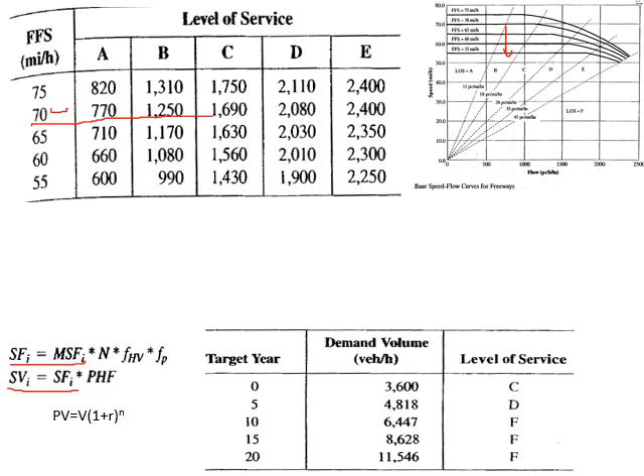Service flow rate is calculated using this equation, and service volume can be calculated using this equation. So I will calculate service volume for each level of service for my freeway. This is the calculation of service volume.

The maximum service flow rate for 70 miles per hour speed is coming from here, MSF. Then it's a 6-lane freeway, so N becomes 3 for each direction. The heavy vehicle adjustment factor I already calculated in the previous slide, 0.89, which obviously will not change for any level of service. The driver population factor was given as 1 — even if it wasn't given, you can take it as 1. So when you multiply MSF with all these values, you get the service flow rate. And then if you multiply the service flow rate with the peak hour factor, you get the service volume.

So for each level of service, you have a service volume for the existing conditions on your freeway. Now, what is the actual volume, and is this volume exceeding the service volume or not.

For that we use the present value equation. This equation says the present value of anything equals the current value, in this case the volume, multiplied by 1 plus r, where r is the rate of growth. In our case it's given as 6%, to the power n, where n is the number of years after which you need the present value. So if I need the present value after 5 years, n becomes 5, and so on.

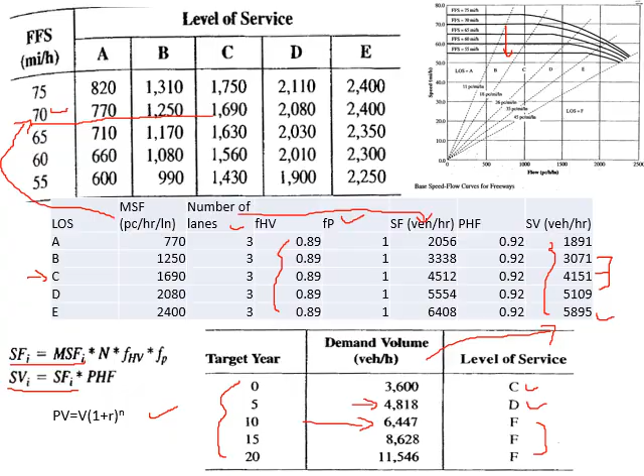Now we have seen in the previous table that in most of the years the level of service is found to be F, mainly between the 5th and 10th year when it converted from D to F. So between those years, what year was it exactly when the level of service changed from D to F? Was it the 6th year, the 7th year, or what?

So again we use the present value equation. Here I have put the present value to be 5895, which is the capacity, or the service volume at level of service E. So E means capacity. The service volume for E, which you calculated in the previous slide, becomes my capacity. So in which year did I reach the present value of 5895? I use the equation.

The current volume is 3600, the growth rate is 6%, so 1 plus 6% means 1.06. And you find n. From here you find it to be 8.4 or 8.5 years. So in the 9th year, level of service F was achieved. So if you want to make any adjustments to avoid level of service F, you have to do it before the 9th year.

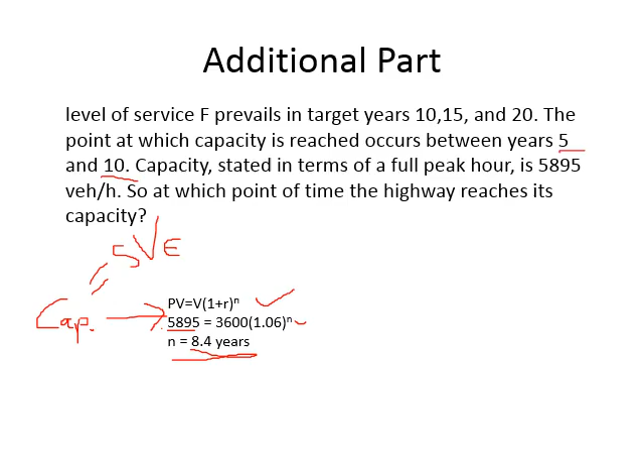Now we have this example. We have a new freeway, the volume is given, the peak hour factor is given, and the percentage of trucks is 15%. The ramp density is this much. The section of highway has level terrain conditions, but it's a very long section. Within this section we have level terrain, and then a 2-mile section of 4% gradient, so we have two different terrain conditions.

Our objective is to have level of service C, but up to level of service D is also allowed. So how many lanes should be provided to maintain level of service C or D on this section which has these conditions?

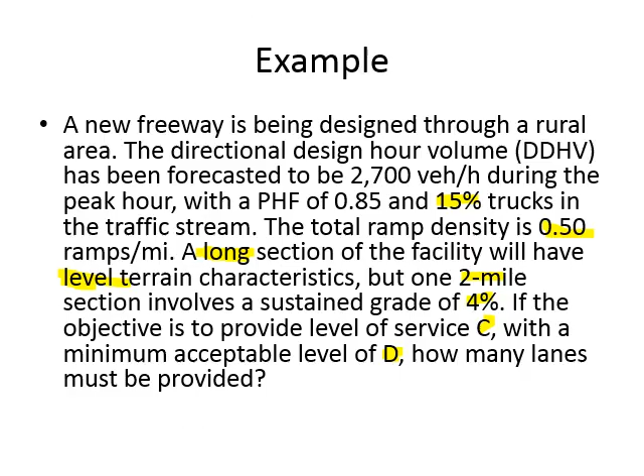The first thing to find for this freeway is the free flow speed. To find the free flow speed we have this equation, with two adjustment factors and the ramp density. Since we are designing a new freeway, I can assume I will design the lane width and the lateral clearance as per standard.

In the previous examples, when the lane width was 12 feet, there was no adjustment, and when the lateral clearance was 6 feet, there was no adjustment. So these are the values I am taking for this freeway, meaning the adjustment factors become 0. So you apply the total ramp density only, and you get the free flow speed to be 74.8 miles per hour. The nearest free flow speed curve to this one is 75 miles per hour, and these are the service flow rates for this free flow speed.

Now we wanted to maintain level of service C or D. So my maximum service flow rate should be either this or this. This one is better, but even this one is acceptable. 2110 is also acceptable. Now I will first of all find out the flow rate.

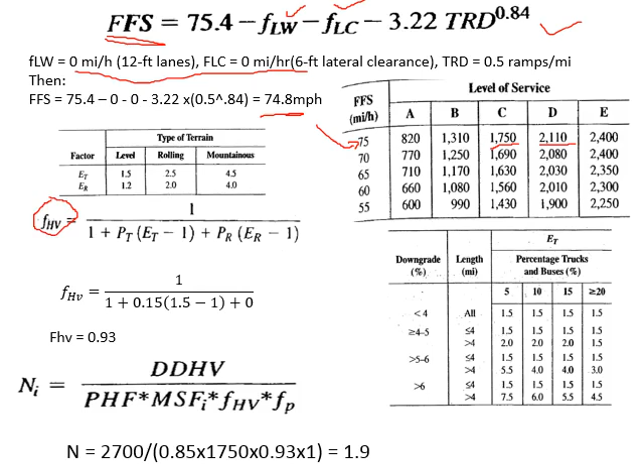For finding out the flow rate I need the heavy vehicle adjustment factor as well. This is the equation for heavy vehicle adjustment factor, and I need PT, ET, PR and ER. There were no recreational vehicles, so this becomes 0. Percentage of trucks was given as 15%.

Now there were two terrain conditions. One of them was level terrain. So for level terrain, the equivalency factor for trucks is 1.5. So ET is 1.5, and the factor for heavy vehicle adjustment comes out to be this.

Then there was a gradient of 4%, and since this gradient can be both upward and downward, if one direction has 4% upward gradient, the other direction will have 4% downward gradient. So I have to consider upward and downward gradients both.

If I consider the downward gradient, you can see for downward gradient, if it is up to 4%, the equivalency factor is 1.5, which is the same as the equivalency factor for level terrain. So if I put 1.5 in the equation, I will get the same value, 0.93. So the heavy vehicle adjustment factor for level terrain and downward gradient is the same: equivalency factor is 1.5 and heavy vehicle adjustment factor is 0.93.

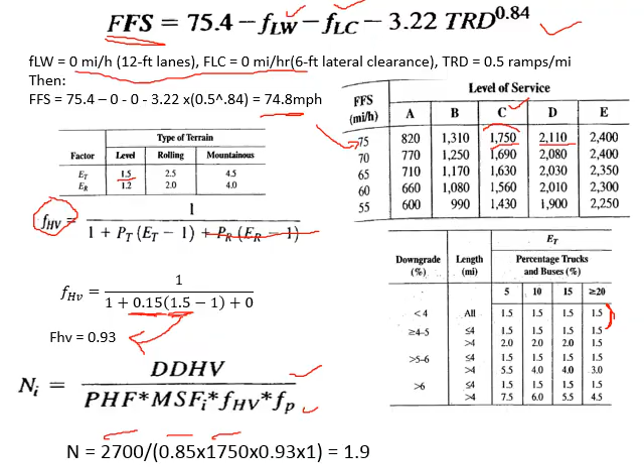So 1.9 lanes are required, so basically 2 lanes are required. For level terrain and downward terrain, 2 lanes are required to maintain level of service C.

If I do the same thing for upward gradient now, then this is the equation, and we have 15% trucks, and we have 4% gradient, which is this range, and the length is 2 miles, so it's in this range. So if you go in this row for 15% trucks, the factor is 2.5. So you put ET as 2.5, and the heavy vehicle adjustment factor comes out to be 0.82.

You put it in the equation for number of lanes, and you get number of lanes to be 2.2. Now this is very close to 2, and the previous value I got was also 1.9, which is again close to 2. So let us see what will happen if I take n as 2.

Now if you take n as 2 in the level terrain and in the downward terrain, I needed a value of 1.9, so 2 is higher than that, no problem. But in the upward gradient condition, if I needed 2.2, then 2 is less than the required value of 2.2.

So let us see how much will be the service flow rate if I put number of lanes as 2, and then I can compare it with the maximum service flow rate which I want for level of service C or D. So I did it in this equation.

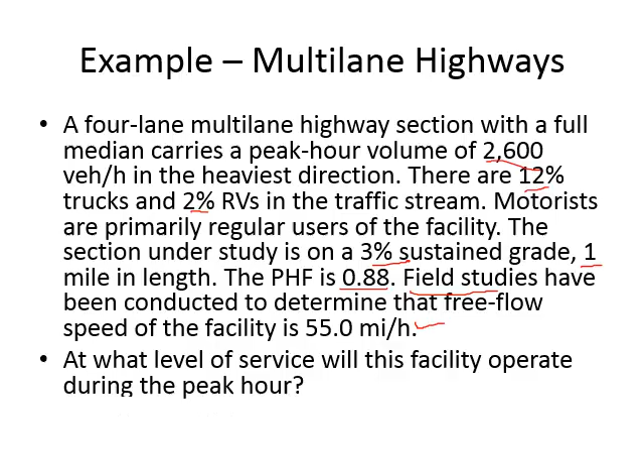Peak hour factor is given, and fortunately they have given us the free flow speed directly. They have measured the free flow speed from some field studies, so you don't have to calculate free flow speed every time - you can go to the field and measure it, which they have done. Now they want to find the level of service for this facility in the peak hour for which the volume is given.

Since it has a gradient, you have to again consider the upward downward condition. Let us consider the upward condition first. So first of all I need to find out the flow rate. If the free flow speed was not given, I would have found the free flow speed first, but now I have it, so my first step is to find out the flow rate. In the flow rate equation I need the heavy vehicle adjustment factor.

This is the equation for heavy vehicle adjustment factor, and I am considering the upward condition first, so these are the tables for upward conditions. I have a gradient of 3%, which is this one, length of 1 mile, which is this one. So ER, which is 2% in my case - the percentage of recreation vehicles is 2% in my case, so which will be this column.

So ER comes out to be 3, and ET, 3% gradient is here, 1 mile length is this one. The percentage of trucks are 12%, which is between 10 and 15, so you have to interpolate between these two values, but you see at 10 and 15% the values are same, 1.5. So even without interpolation I know it is 1.5, so ET will be 1.5. Then you have the percentage of trucks, percentage of recreation vehicles, ER - put in the equation, you get FHV to be 0.91.

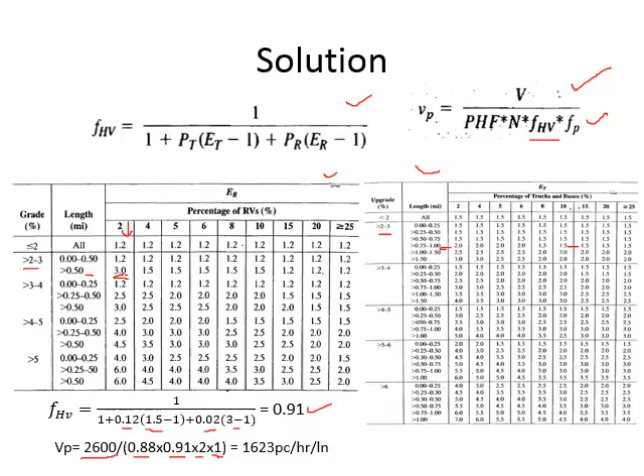If I repeat the same process for downward gradient now, these are tables for downward gradient. For ET I have this table. So the gradient is 3%, which is here for any length - length doesn't matter here. Then my percentage of trucks are 12%, which is between 10 and 15, but again you see the values are same, so I don't have to do any interpolation. If the values were different I would have done interpolation to find out the ET at 12%, but in this case I'll just take it as 1.5.

Then for ER, I told you earlier that there is no separate table for ER in downward gradient, so for ER downward gradient just take the value of ER for level terrain. So ER for any downward gradient is 1.2, you put ER as 1.2 here. The heavy vehicle adjustment factor is 0.94. You put it in the flow rate equation - everything is the same as the previous equation, only the FHV is changing. So your flow rate comes out to be 1572 passenger cars per hour per lane.